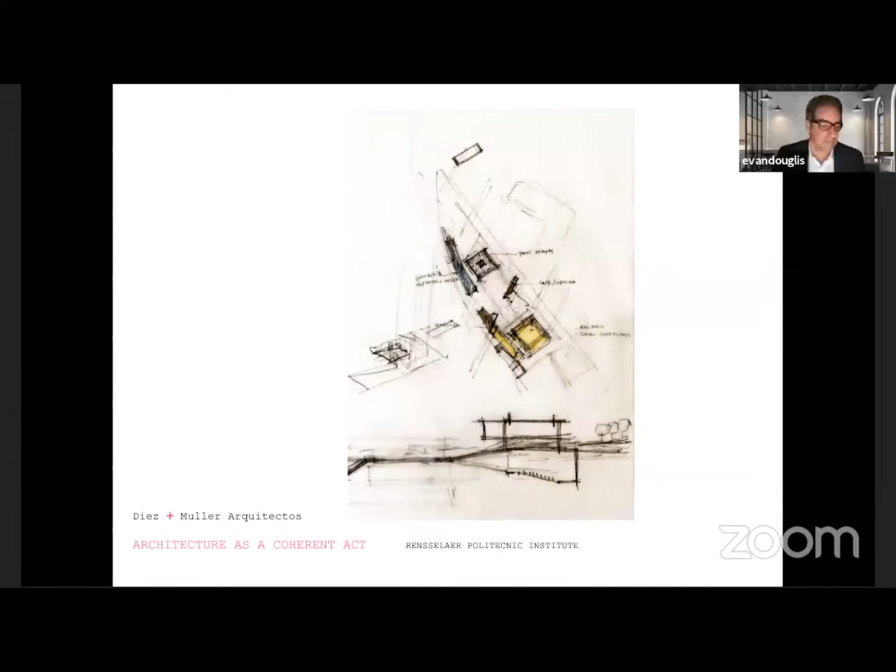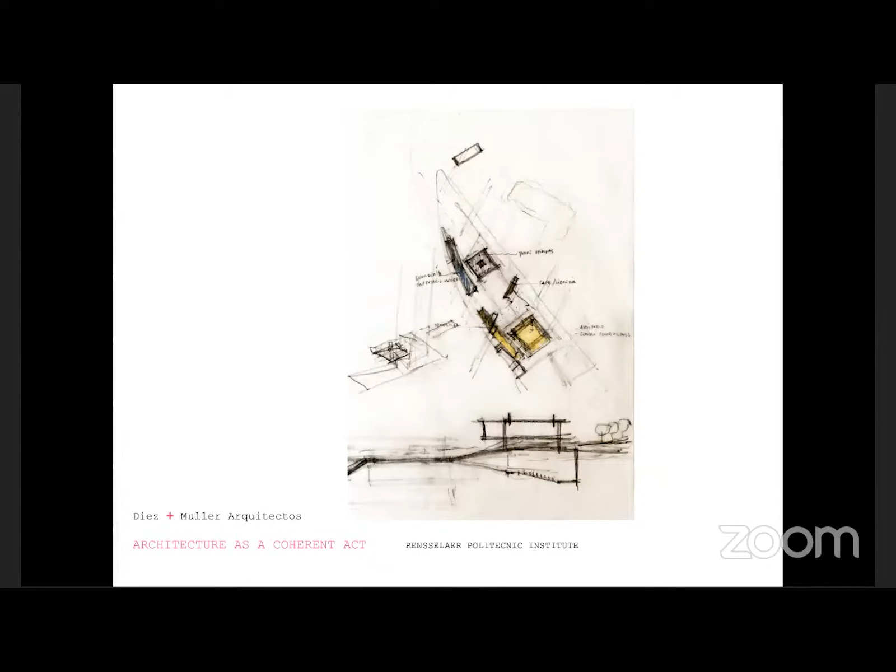Our talk today is called 'Architecture as a Coherent Act.' As I said, we're a design office in Quito, Ecuador. We do all kinds of projects, all kinds of scales and typologies, from small residential private houses to large-scale buildings and residential work.

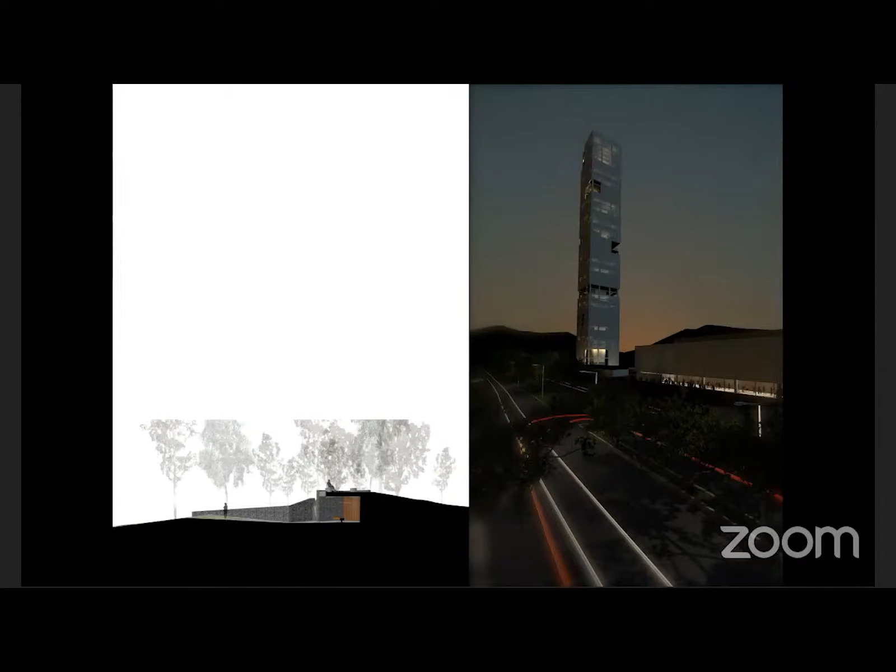For example, here we've done work like a little chapel for a two-person house, to a large-scale project which was a competition for a governmental building in Quito. We do a lot of competitions, and we try to be engaged also in academic work. But as I was telling Evan, our office has been very busy the last years, and we've only been able to do some part-time work with schools, but it's something we really, really enjoy, and hopefully we'll be able to go back soon.

Something important is maybe to start talking about where our field of work is. Quito is in Ecuador, as we know. Ecuador is at latitude 0, right on the equator—that's what it's called, Ecuador. Ecuador has mountains, has the Andes, has the coast, and has the jungle. We live in the highlands, in the mountains, in Quito.

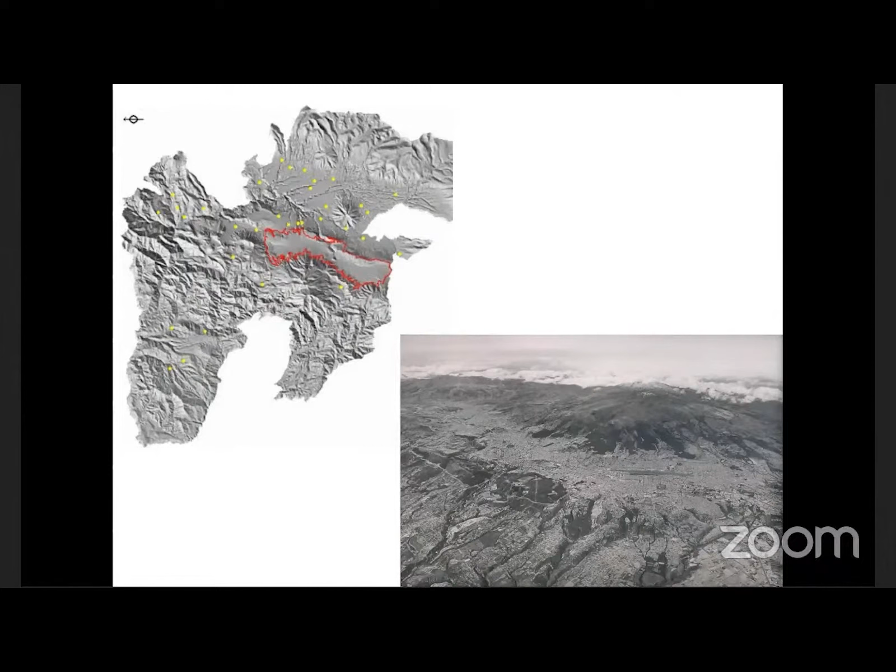In the bottom picture, you can see this strip and extension that runs all across this valley, going north-south. Then you have the mountains, Pichincha in the background, and this other little hill in the foreground that takes you to the valleys—new suburbs where people are moving. The city has grown a lot and gotten very dense, so now a lot of people move into these valleys where the weather is a little warmer. Quito is 2,800 meters high, so it's pretty high, and the valleys are about 300 meters lower with a better climate and temperature.

The lecture I want to speak about, I'm going to show in two parts. The first part I'll go a little faster and briefer, and in the second part I'll show you more.

I'm going to focus on two projects we finished not too long ago and compile a few ideas or reflections about the coherency of working as architects here in Ecuador, especially in the highlands. We've done some work outside the city and even outside the country, but most of our work is focused on the highlands, this mountain region, which is very characteristic and specific in terms of culture, tradition, urbanity, and architecture. This excites us a lot and has a lot to do with how we work.

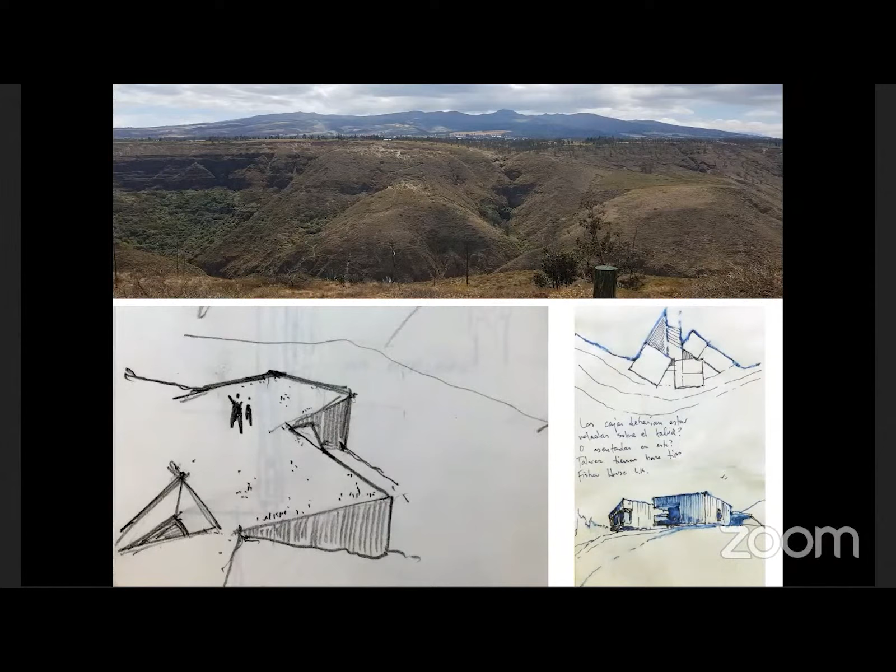Here you can really see what I'm talking about—this big canyon where the mountains and scenery are such a big part of the experience. The views, how you treat the topography, how you situate the buildings in relation to these mountains, is very important.

This house, which we're going to start constructing fairly soon, addresses the relationship with this element that receives you in a very discreet, almost invisible manner from the top of the hill, then opens up towards the canyon and the views. The interior spaces give you a glimpse of what the views, the spaces, and the relationship to the landscape will be.

Our process is I think the most important part of how we work, or what we produce. We're as much or even more excited about how we go through these projects and develop them as the final product.

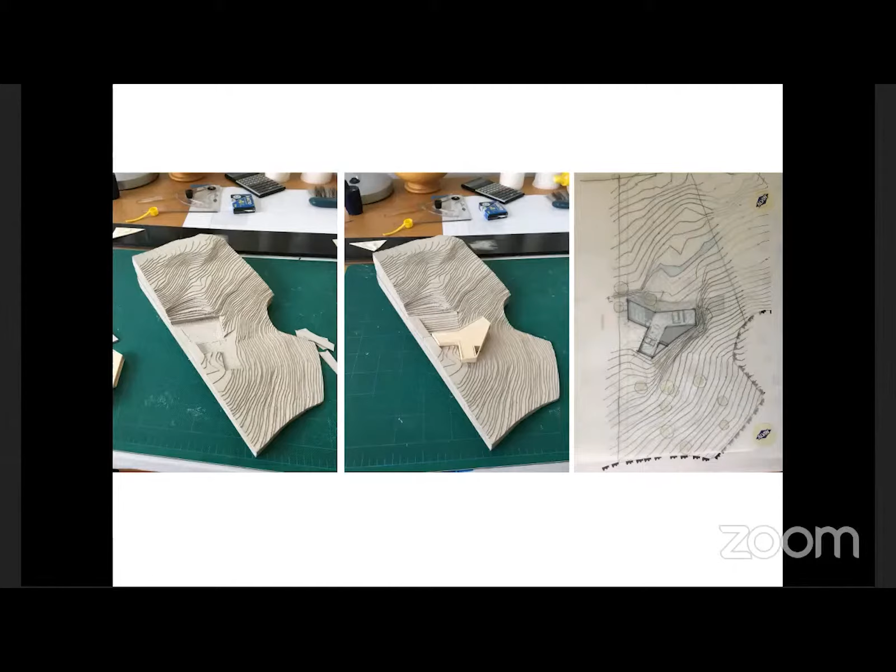This is the result of that first house, the second house I'm showing you. Those initial drawings are studies in the relationship of the house to the place, how this works. This sort of star-shaped house is designed and built within the trees, around the trees, and how part of the house sort of submerges on the right towards the topography, and then sits on the other side of the terrain and opens up towards the view.

And this, you can see very clearly, this relationship of the ground plane versus the roof plane towards the landscape and the views.

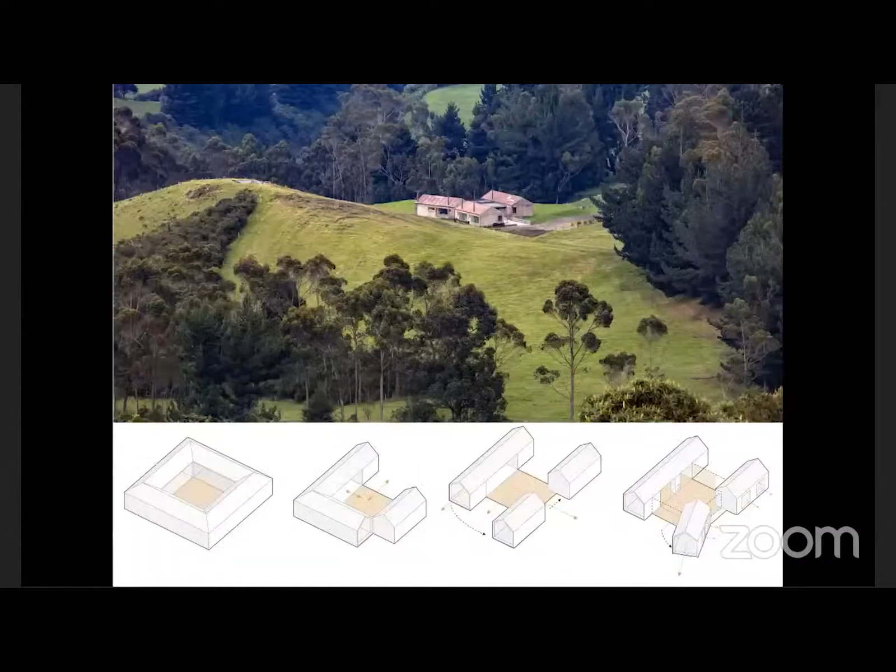This is another house which we finished not so long ago. This is about an hour and a half away from Quito, from the city. It's more on the countryside, on the real mountain. And the views here are pretty much unique because you have all these different volcanoes and snow-capped mountains.

As the house started developing, we started with this very traditional colonial type of arrangement, this U shape with the patio and courtyard in the middle. Then the house started fragmenting itself and orienting its views, with bars that have views oriented to all these different specific mountains. You can see here, this is sort of what we have to work with.

Which is not so bad, and makes our work really interesting because it's so varied and different every time we approach a new project. And again, how the house sits in the landscape and its relationship to the surrounding.

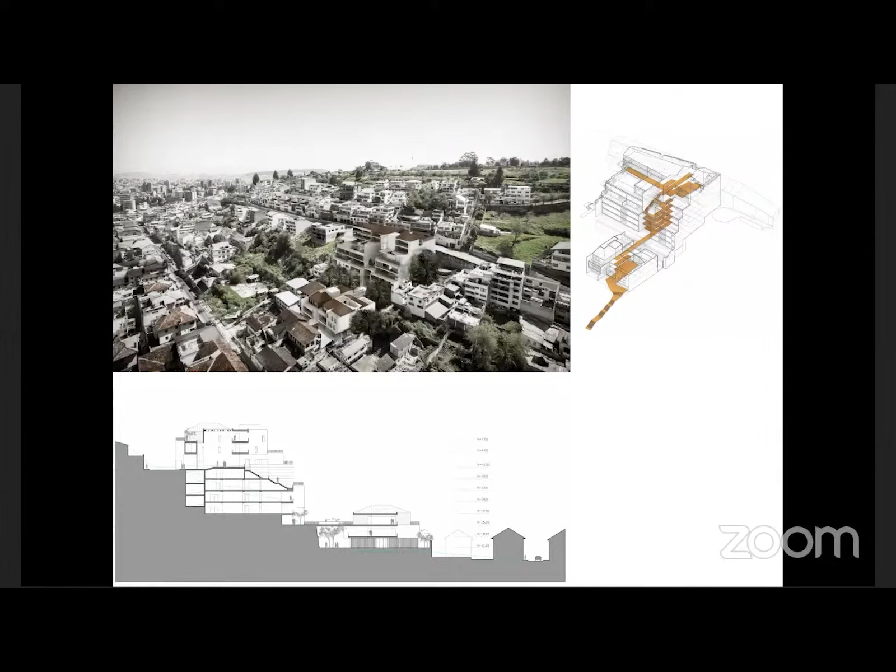This is another building we did, which sits on a really high part of the city. You can see the more urban context here, and that's what I was speaking to you about before, which is how we're sort of lucky to work in these different locations and zones within the city.

This is a building that sits on an existing stone podium that used to be an old house, which is this white, pristine project that looks over the views, but sits in this existing retaining stone wall that used to be part of the collective memory of all these old neighborhoods that used to contain these elevated gardens and platforms for the houses that used to exist here a long time ago.

The second idea, although you're going to see how all these projects mix these themes together, is the idea of matter and tectonics. It's important to say that here in Ecuador, craftsmanship and hand labor are still very cheap and very qualified, compared to most construction in the US, which is more standardized and catalog-like, where you just specify materials and get them together. A lot of the projects I'm going to show are mostly done by people who are traditionally qualified in craftsmanship, putting things together more manually. That's something that really excites us, because now we're not only thinking about space, light, and materials, but how we're going to assemble and put these things together.

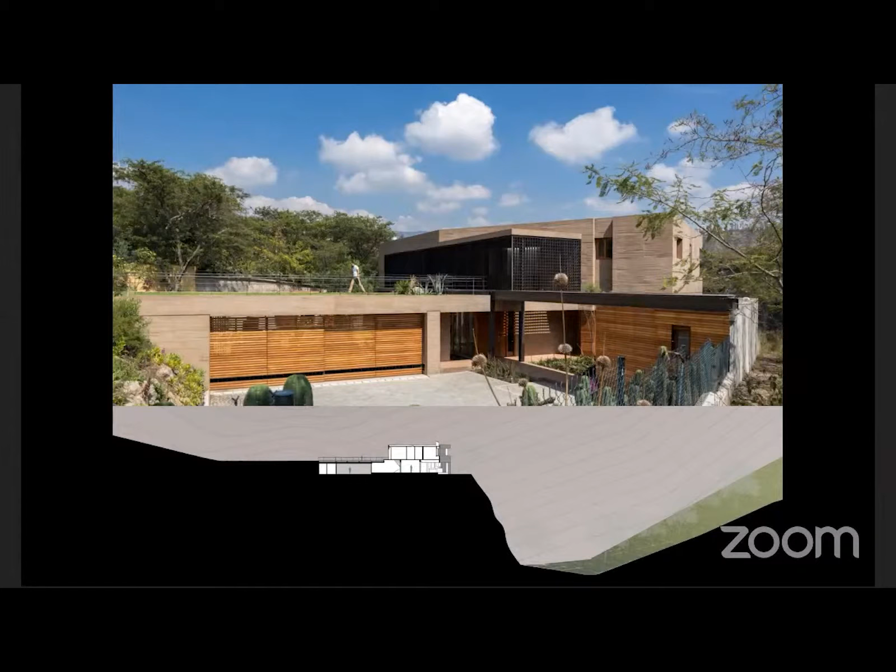I hope that my English is okay, I was afraid it was a little rusty. We don't speak much English, especially not giving lectures in English every day, so hopefully everything makes sense. If you have any questions or want to say something, please go ahead. Hey Gonzalo, it sounds perfect, your English is great, it's perfect. Great, thank you, thank you.

So this house is very much about materiality. The sun here in Quito is very important in terms of how we take advantage of materials—it's the most direct sun you can get in the world because it's almost perpendicular, being on the equator. So the materiality comes to life, I would say, because of this really strong sun.

We have some really strong cancer issues also, but I think if you take care of yourself, the benefits are more important. So here, in terms of how you shade and control the light, it's not only the concrete and the detailing resembling the context, but also steel frames that start to contrast with the more traditional construction. Stone is a very important material here too, which is still cheap to work with, and it's real stone.

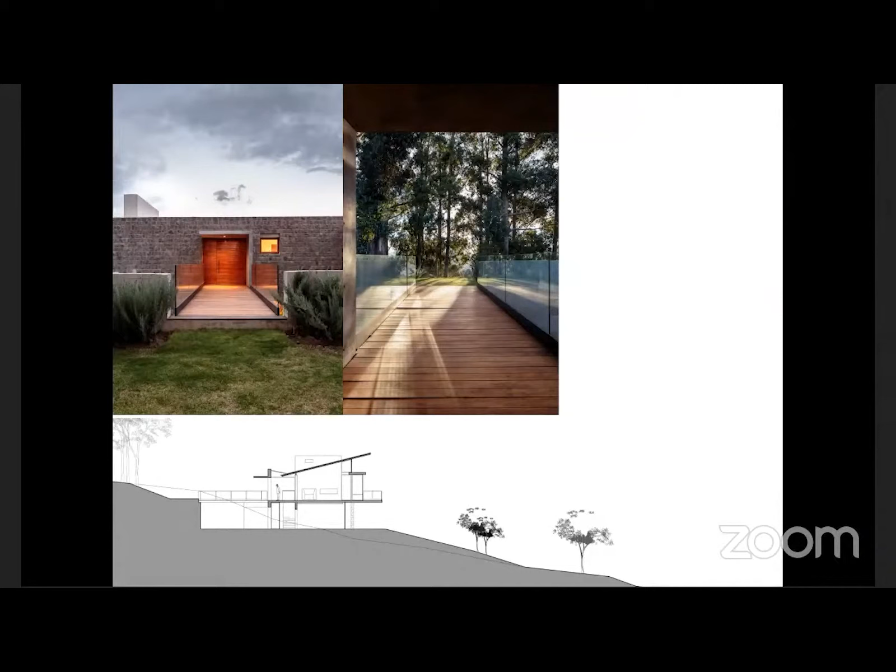This is a house we did a while back, one of the earliest houses we did. It's about this house that sits on a very heavy stone retaining wall, with a lighter structure and roof on top of it. I don't want to show you all these projects in detail, I just want to show the importance of materiality and the easiness of working—not the easiness of the technique or design, because that's never easy, and you have to really think about what you're doing and how you're putting things together.

But in terms of the availability of material and craftsmanship to do these things - for example, here we're working with stone. We have this steel bridge that takes you from the top level of the site towards the house over this courtyard. But the stone we use on the walls is a different type from the pavement stone, or those little details on the floor that direct certain axes, which are smaller river stones. So there's a lot to take advantage of here, and that's where we're interested in most of our architecture - how we use these resources in terms of craftsmanship, of materials, of the people who work these, which are not common in other parts of the world, and that's what we should be taking advantage of towards our design.

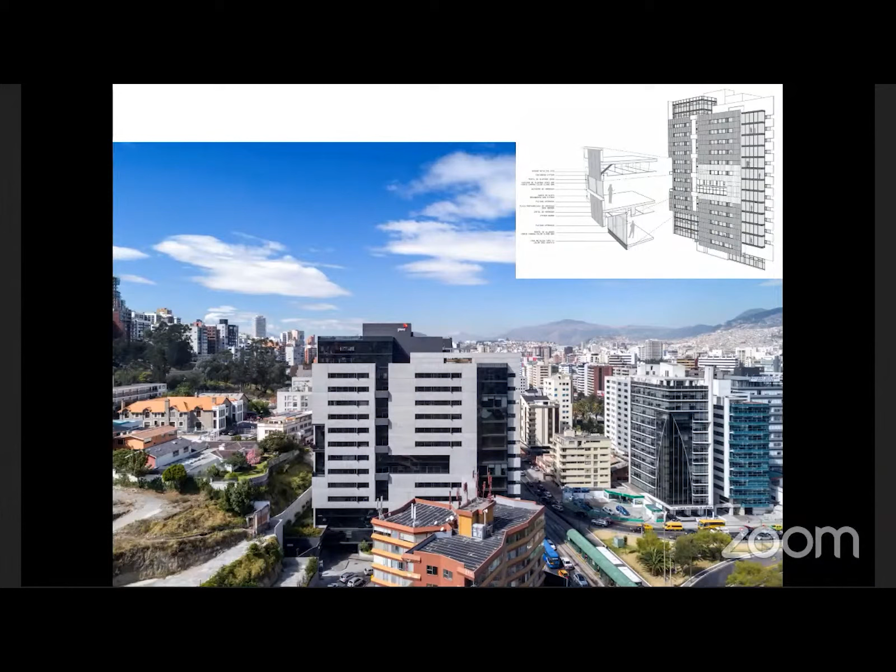So it's pretty much a glass building, in contrast with this other envelope, which is all concrete material surrounding the whole building. The material here is more refined, a more engineered type of construction. We worked with a very big construction company, which promoted the building, and this is where they're having their new offices now. We used precast concrete panels for the envelope, with just a couple of big walls that intersect the building built cast in place. But most of it is these prefab panels that make this tapestry type of finish when you look up close. From far away, as you can see in this image, it's this plastic envelope - plastic meaning plasticity - that surrounds and gives this very abstract sculptural quality to the building.

As you can see, it's a very different type of construction - really good formwork, good quality vibration, good quality pouring, as opposed to that other more traditional and less formal type of construction we saw in the other houses, especially the house we saw before. So they're very different contrasts in terms of materiality, but they both talk about an idea of what you want to achieve in these projects, and the finishes in terms of what you want to do.

You can see the light that I was telling you about in Quito, which is a very strong direct light, which brings this incredible three-dimensionality, this shadow play to all the projects, which is very, very interesting.

I'm not going to show you the whole project, but this is the main entrance. There's a big lobby, some artwork commissioned both on the inside and outside of the project. There's a big public square on the outside, and you can see those big walls that are cast in place. But then the envelope, what's on top of the glass of the lobby, is all prefab panels that were brought and put in place on the side of the building.

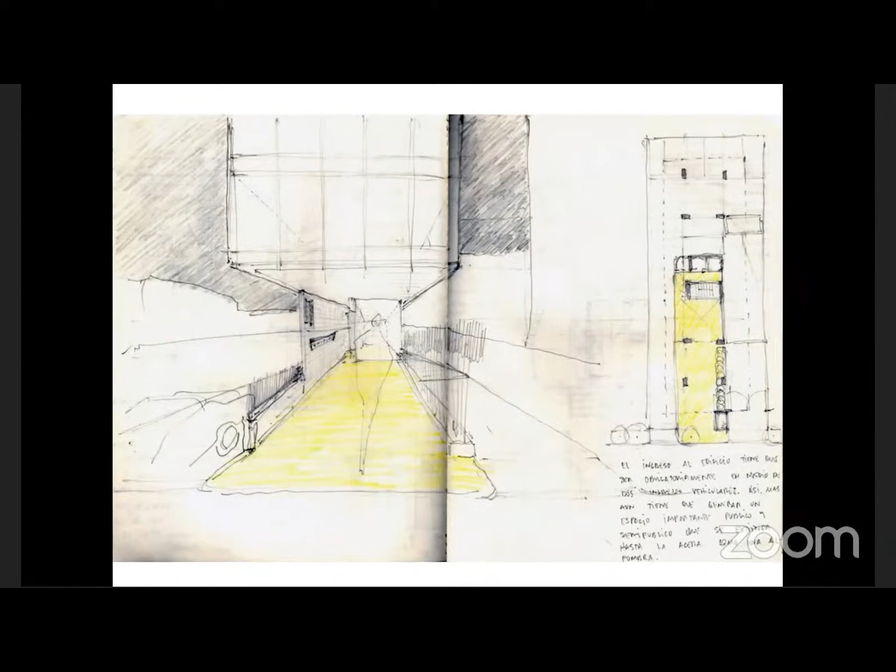As I said, we work with all kinds of projects, and we've had the luck of working a lot in the city, doing some very urban projects in very urban conditions. Other than giving this new face to the city with these taller buildings we've been able to work with, most of our interest in how we work with the city is how the building first responds to that context in terms of its vocabulary. We usually try to work with more silent and simple buildings, whose power derives from different things rather than working with strange or eccentric forms. We try to do these cleaner, more silent buildings that talk a lot about the relationship to context and materiality - that's what stands out. But most of all, it's how these tall buildings sit on the ground and relate to the street level.

That's what really interests us and makes a difference between having this just tall building that you can look from afar, or having these buildings that contribute somehow to the public realm and the city. You have to understand that most of these buildings, as I was telling Evan before, we haven't done many public buildings. We're working on doing some of that stuff. A lot of these buildings are private buildings, so these are buildings that are not really open to the public. They have their own security and more private conditions, but it's how you deal with what's going on at the bottom, the base of these buildings, and how you relate to the public and private realms, what makes these projects successful, I think.

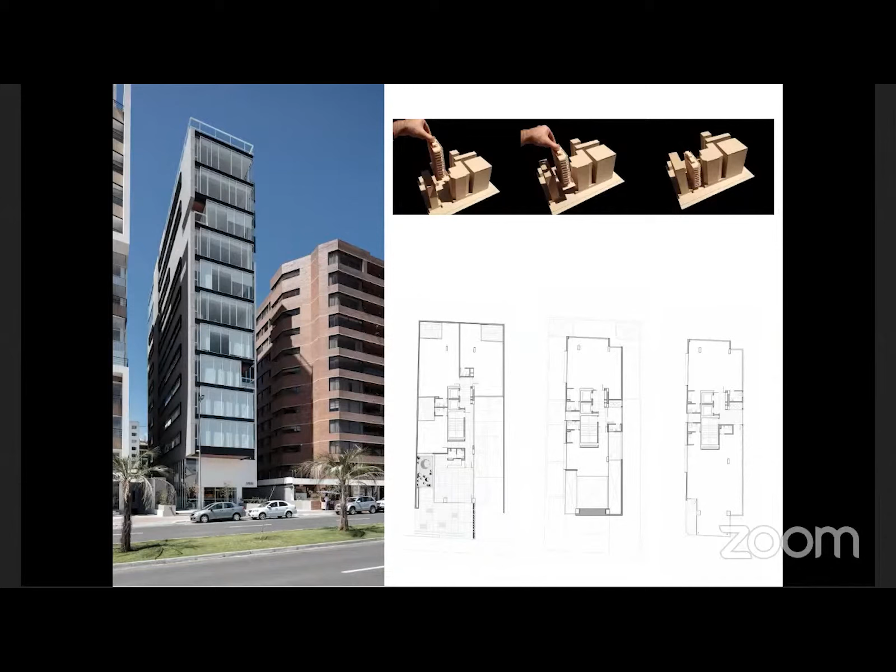I don't know if you can see on these pictures, they're not very good, but the brick building on the right is at a different level from the street, or they have these closings for security. Our idea is to sort of open these buildings up to the city, as I showed you in that other big building, through that open plaza, how you use the landscaping, and how these open spaces start to integrate into the interior of the building.

It's a double height lobby space, which continues the paving and sort of makes you feel, even though you're not part of the building, or you're just somebody using the square, there are a couple of benches, you can go eat there, even if you're not going into the building. That transparency and openness to the lobby sort of makes you feel you're part of it, and this dual idea of that one relates and comes out of the other.

So the idea is that those little moves or intentions make big differences in the city, especially in this city, which is starting to become a very dense city, and what happens on the street side becomes very, very important.

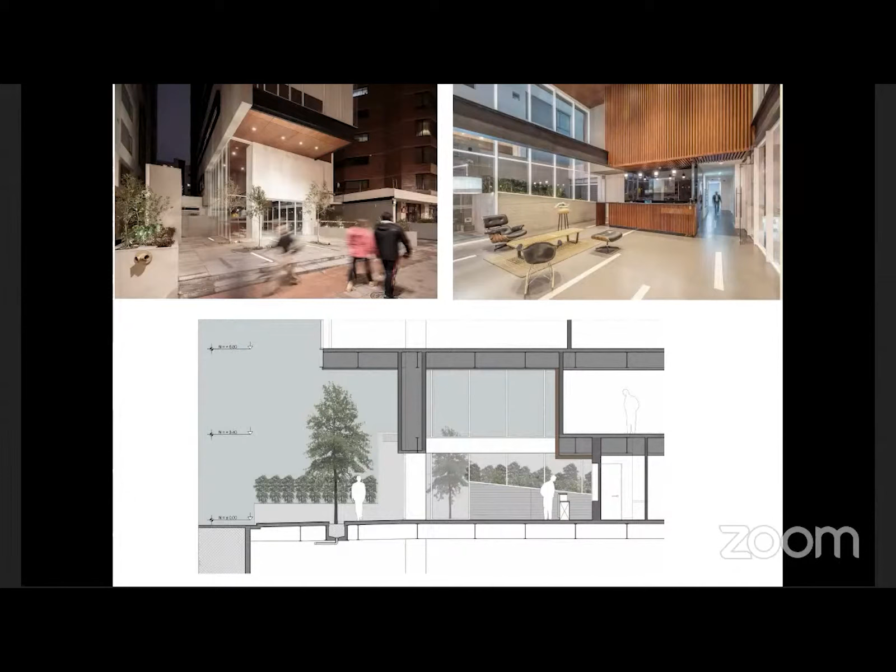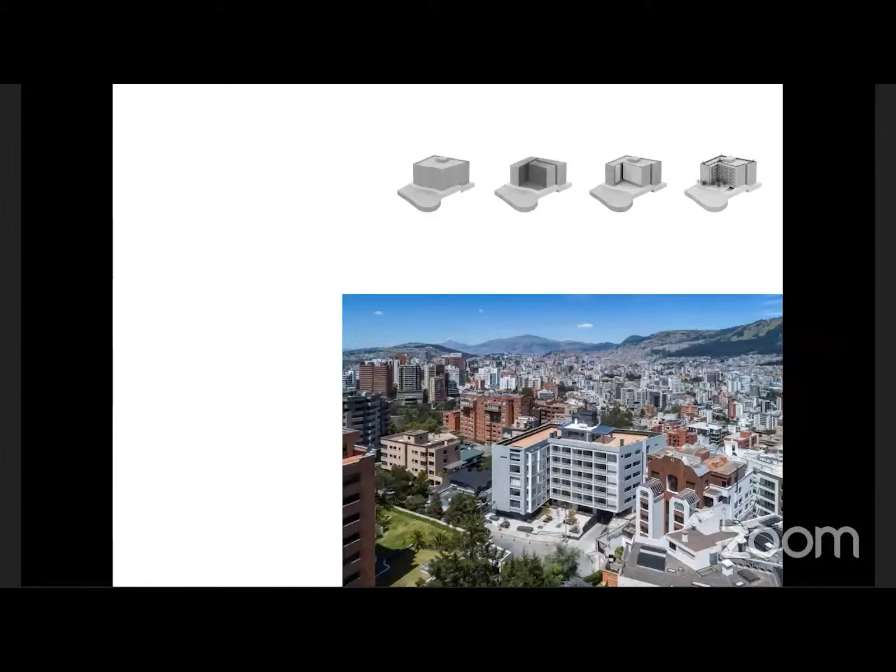Security. Most people think that by building these big walls and enclosing the building, that gives them more security. That's not really the fact, but we sort of approach it the other way around. We sort of open these plazas to the city. This has sort of an L configuration, an L-shaped building that opens up and gives this narrow street a big opening, where, as I said, it's sort of a private, semi-private, semi-public square, but all the people around it use it. The kids in the building go out and use the plaza, they wait for the school bus there. So it's how, independent of the architecture itself, how you permeate these buildings towards the city, and the difference you can make by opening these spaces up instead of enclosing them towards the street.

And then you get all these more interesting spaces where a lot of activities happen. Landscaping, benches at night, it becomes sort of a lively place that relates to the circulation or the apartments on top, and it becomes a very lively place.

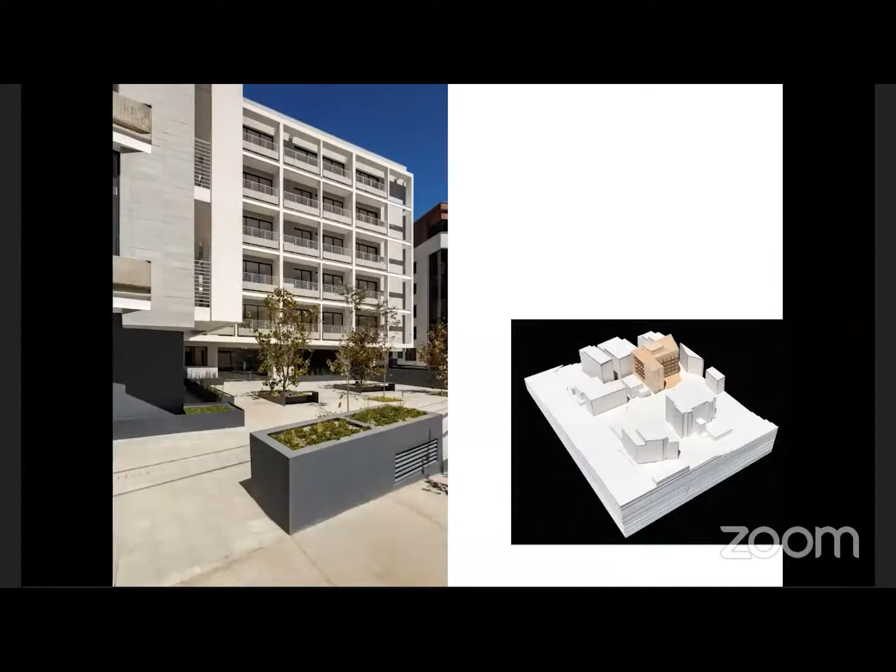Before I go into these two specific projects, which contain most of these ideas, there's the idea of sustainability. That's something we're working on more every day. It's becoming a big part of what we do as architects. I think maybe we're a little slower or behind what's happening in more developed countries like the US or Europe, but it's catching up fairly quickly, and it's something we're very interested in, hopefully taking into consideration for most of our projects in the future.

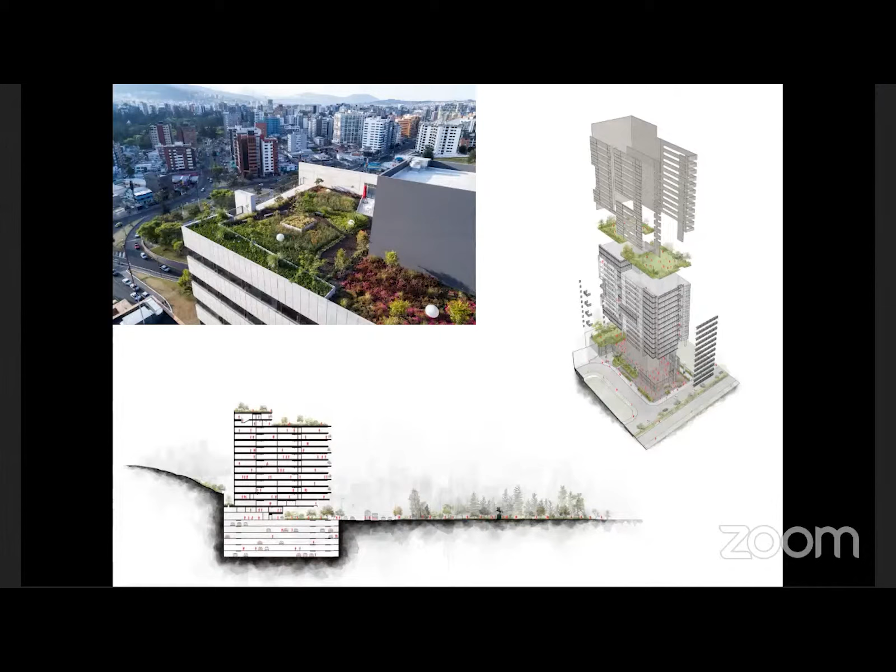This is one of the first LEED silver buildings approved here in Ecuador. Other than the greenery, it has a whole bunch of things that make it a very eco-friendly building.

This is what you see when you're on the terrace. It's not just a green roof, it's very... what would you call it... you sort of feel like you're in a house more than in a building itself. There's a relationship to these elements, like concrete walls that frame views toward the city, and then you look to the mountain. It's about these buildings starting to bring a little more than just architecture and aesthetics to the city, but a little more consciousness too.

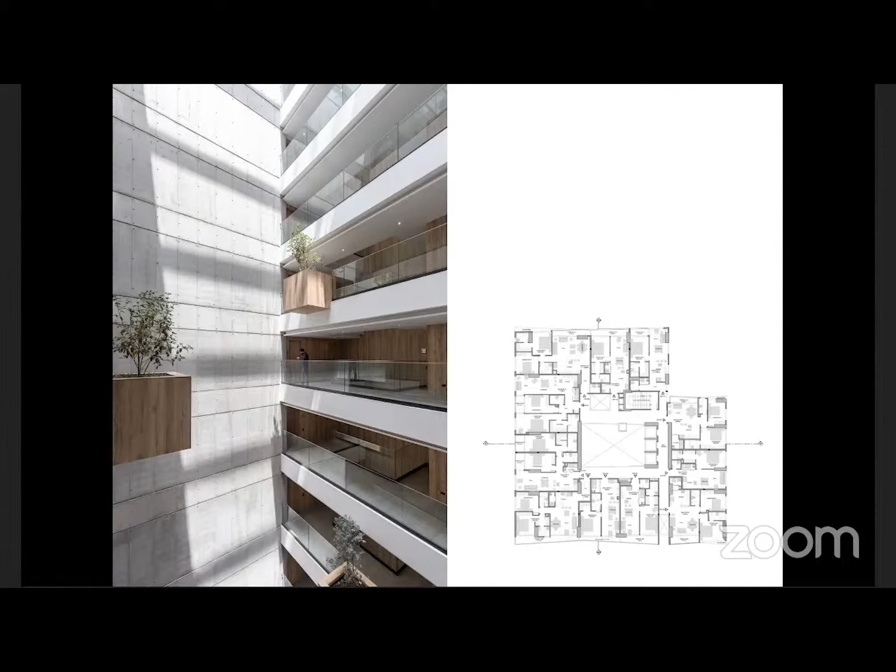Then there are these little elements holding plants and trees in the air that go randomly above, all along the building and the atrium, ending up on a green terrace at the top. The scale of this building is very interesting in terms of these big closed concrete walls versus the circulations and little boxes of vegetation that randomly appear all around and up into the project.

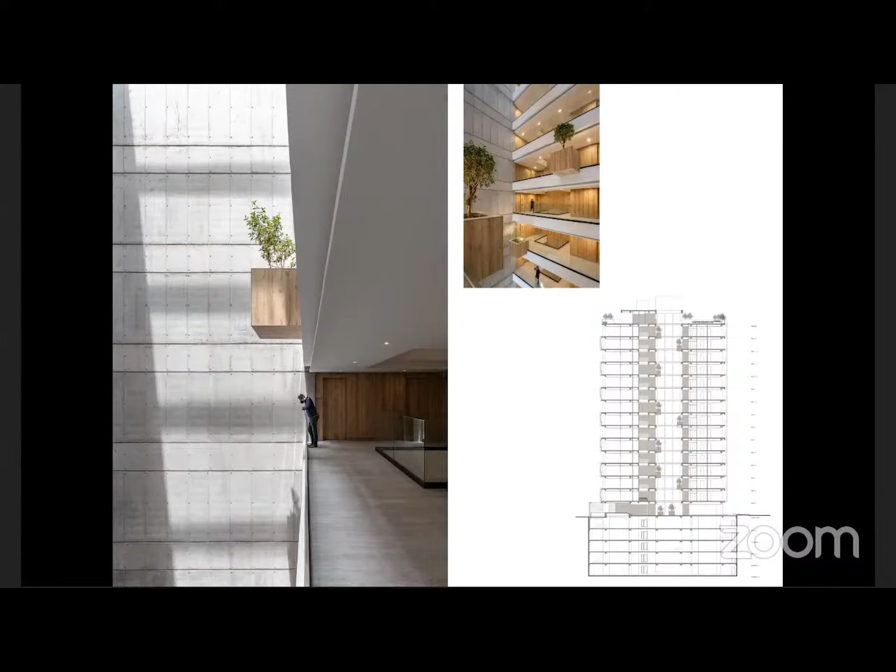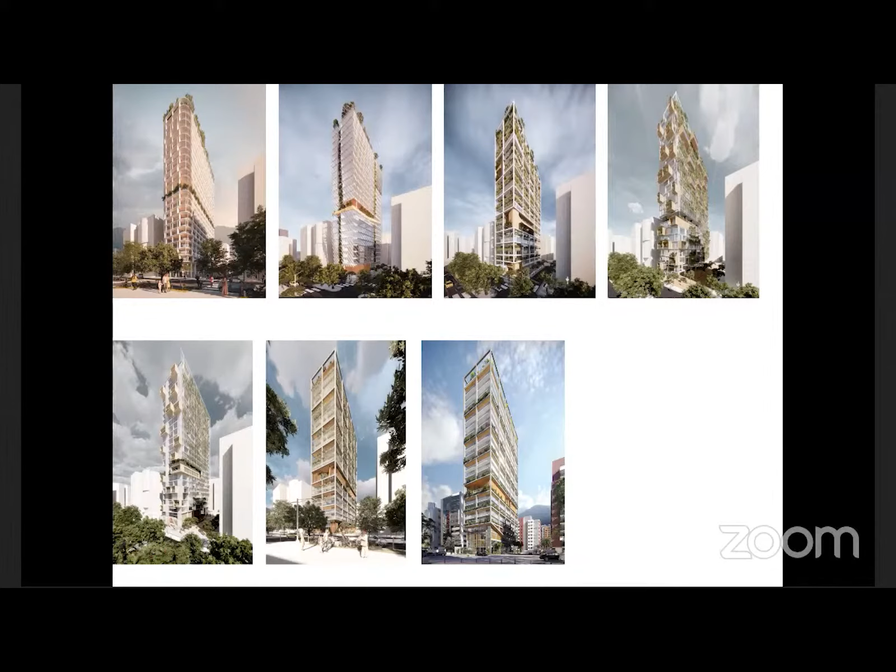Now I'm going to go a little deeper into two projects that talk about a lot of the ideas that I mentioned before.

One of them is the Natura Building, a project we finished 2 years ago. This is where we have our office, and my partner Felipe lives here also. It's a mixed-use project: 70% office space and 30% residential, with only 5 apartments and around 25 offices. It's a project we enjoyed a lot and are very proud of, because it speaks to a lot of the ideas and the way we want to start living and designing buildings as architects.

As I showed you in one of the first images, you have the city on this plateau, and then over the hill you have all these valleys that are growing very fast. This building is in one of those valleys, which is pretty much the one growing the fastest.

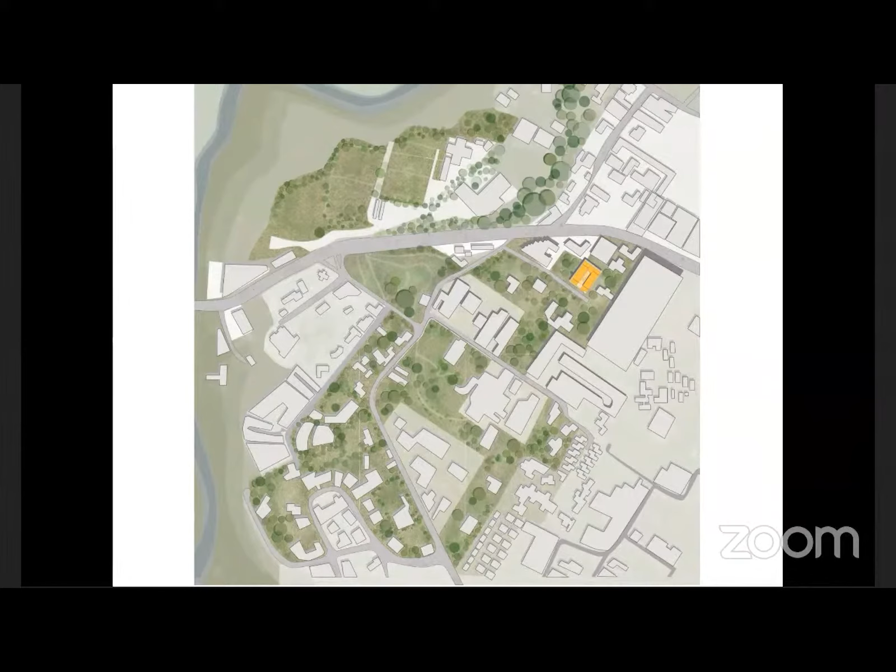really speaks to the way of life you have in these valleys, which is direct contact with nature—a little less evident in the city, which is harder, less green. And it's about how you want to start designing buildings that aren't only houses sitting on open landscapes, but a little more dense, while really responding to ideas of climate, topography, nature, greenery, and materiality.

They're wider, a little fatter. So we started understanding this place as a very green, low-key type of place. There are still a lot of residential houses here, so we thought we really had to maintain and respect the greenery, the scale, and the relationship of the building to the street and to the neighborhood.

Even though this was going to be an office building, we didn't want to make it very open and permeable, but something that respected and matched the materiality of the surrounding houses and context, maybe turning it outside in—so what really matters and becomes important is what's happening on the inside.

The first part is some diagrams that talk about the site itself. There's a one-story difference in levels from the street side towards the back of the site. As you can see, there were a bunch of really old and important trees that we wanted to save, and we didn't want to come in and do a tabula rasa, but instead maintain as much of the greenery as we could.

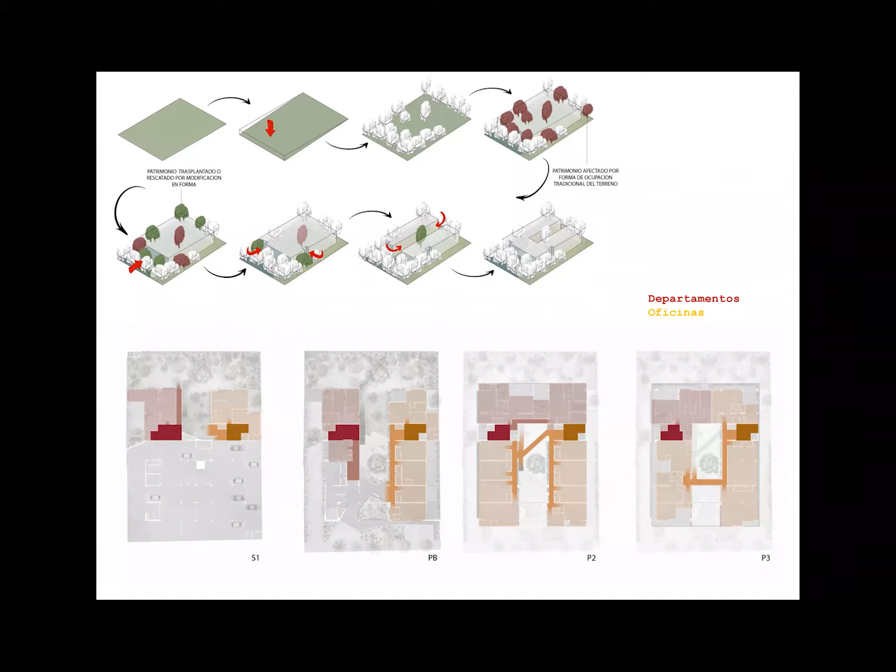As I said, it's this U-shaped project, which from the outside works as a very enclosed, silent, and discreet building.

This neighborhood, which is mostly residential, always has this fear of a bigger building coming to contaminate this smaller scale type of neighborhood, so that's something we wanted to be careful with. It's only a 3-story building with a very enclosed facade, few punctured windows and openings towards the street, so there's big privacy between the office spaces and the existing neighborhood. But it's a very permeable and open space on the ground floor, which is the main idea of what we wanted to do towards the context.

It's a white brick construction mostly, with some exposed concrete in terms of how these brick walls are sustained, and this materiality starts to talk to the neighborhood. A lot of the houses across the street and next door are brick houses, some white brick. So we wanted to do this very contemporary building, which talks about a new modernity in the valley, which is a little more traditional and rustic in its architecture. The materiality helped us achieve that low-key, more traditional type of architecture. It reminds me of Alvar Aalto in how he managed to do modern buildings that are still really related to the context and the country.

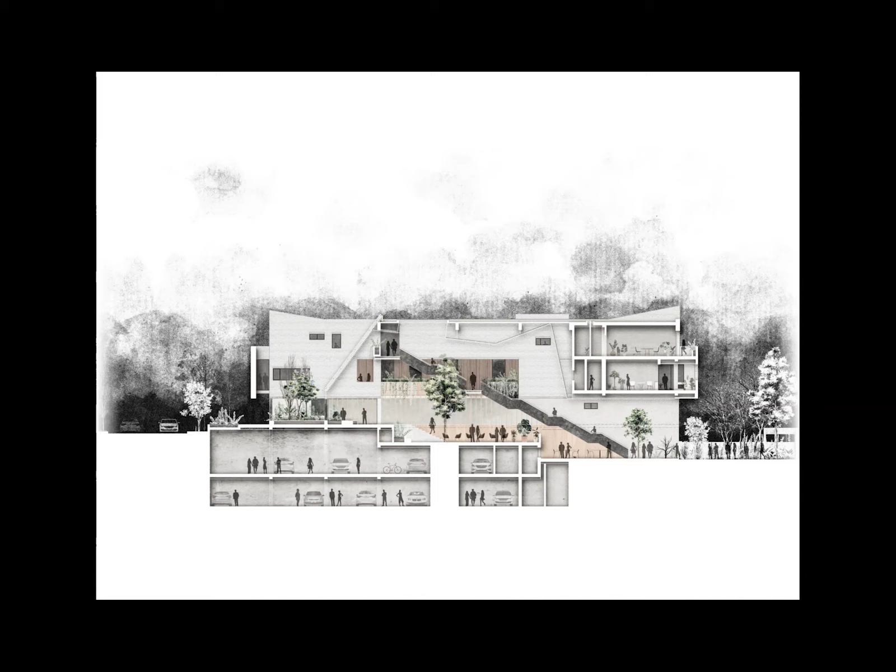It opens up through a series of patios, openings, and exterior gardens and spaces. As you can see on the left of the drawing, it goes from these filters from the street, green gardens and patios, and a very enclosed, blind facade toward the street, into this 3-story atrium which sort of explodes once you come in. That's something we really try to do in our projects, not discover everything at once - as we arrive and move around the project, we start discovering things. It's a big surprise, because from the outside you don't expect what's going on inside, which is this really big 3-story space that circulates towards the perimeter offices or apartments through open stairs and bridges that connect and serve all the different levels of this U-shaped configuration.

Again, the light towards the material is something we really take advantage of. It's what brings these materials to life, this Quito sun, which is really amazing. And then again, the white brick contrasted with the wood, which we wanted to use to create a little more contrast with a warmer material, which is what we've done on the inside.

It's a place where during the day it promotes people not only moving from place to place in this big atrium and open circulations, but through a series of stairways and sitting areas, there's even outdoor tables and chairs where people have lunch or work on their computer - sort of like outside co-working areas, which are very successful in terms of how people relate inside the building. We wanted to make this space not only for the use of the office or the people who work there, but for other types of activities too.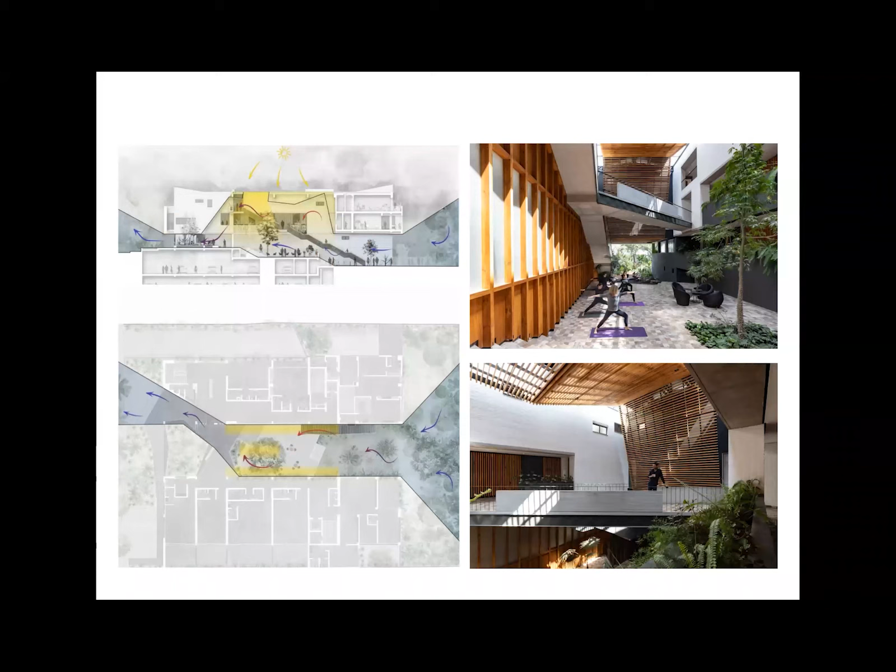As you can see, from the left, which is the street level, the atrium terraces down to the right and ends up in this garden, which you see in the top right picture, through these stairs and platforms, ending in this big area of greenery, which was mostly the existing trees of the site, and it's open on the bottom. So the air comes in and usually rises up to the other side or the top of the atrium, and even though there's a lot of sunlight coming in, it's a very fresh, tempered and nice place to be in.

But again, you see the idea, and this is probably what excites us mostly about the project, which is this idea of working and living in this very, very green and old landscape that existed in the original site.

This is what we worked from, the top image on the left, which is all this greenery hanging from these levels on the atrium, all the way to these gardens on the back, and how they relate to the different spaces. Being these really old buildings, for example on the image on the bottom left, our office is on the top floor, but we have these trees that go from the 4th story down all the way up, and an outside space in our office. It's very nice to be related to the tops of these trees and the views.

We came up with something like this. The plant, which is those white volumes, sort of grew a little more towards that parking area that you saw before, and it ended up leaving these wedge or teeth-like shapes.

So what we proposed was that the main building, the main facade of the plant, which used to be nothing, instead of having this 4-story little block, would be this really long horizontal building that would be sort of the new facade or the face of the project, where you would still see the plant on the back, the industry plant, but it would sort of give them a new image, a new face to what they had, which wasn't very nice before.

And so what we proposed was this very elongated snake-like project, which sat on this irregular site. Between this long project, long building, and the actual buildings on the back, we were going to build sort of the support spaces like cafeterias, all the service areas, lockers.

They have about 500 employees there that work in the 24-hour shifts.

So it was going to be how to contain all this new project against the old plant, and then start to bring these new gardens and open areas between these two areas that relate the two parts of the project.

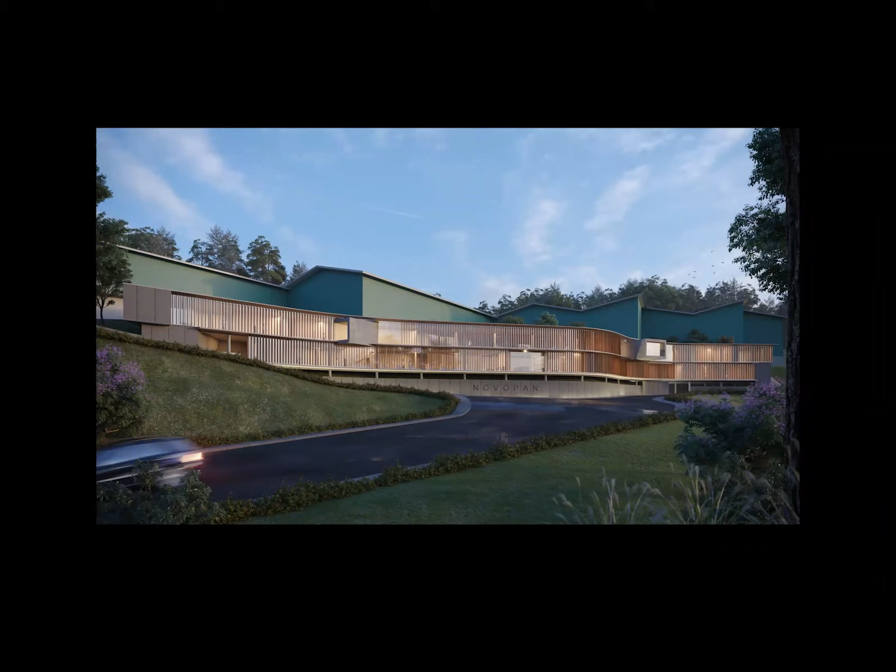And this is what we ended up having, and what ended up convincing them of the idea, which was seeing this industry through the face of this new, really permeable, open building towards the street and towards the highway. That is pretty much what you see when you come in. It's a very visible building from the highway, from when you're driving through there.

And what we told them we wanted to do was, since they produce these melaminic panels that they use for all kinds of architecture and interior and finishings, was that we wanted to do a building that was pretty much, the architecture was the structure. It was a concrete structure, and their panels, and their melaminic panels.

That was pretty much going to be, well, we had the glass and the envelope also, but there wasn't going to be much materiality in terms of finishings, just the concrete and the wood, the melaminic wooden panels that they produce.

And this is what I was telling you. You have that long, really elongated, irregular, sort of curvy building on the front towards the street, which is a very open office area.

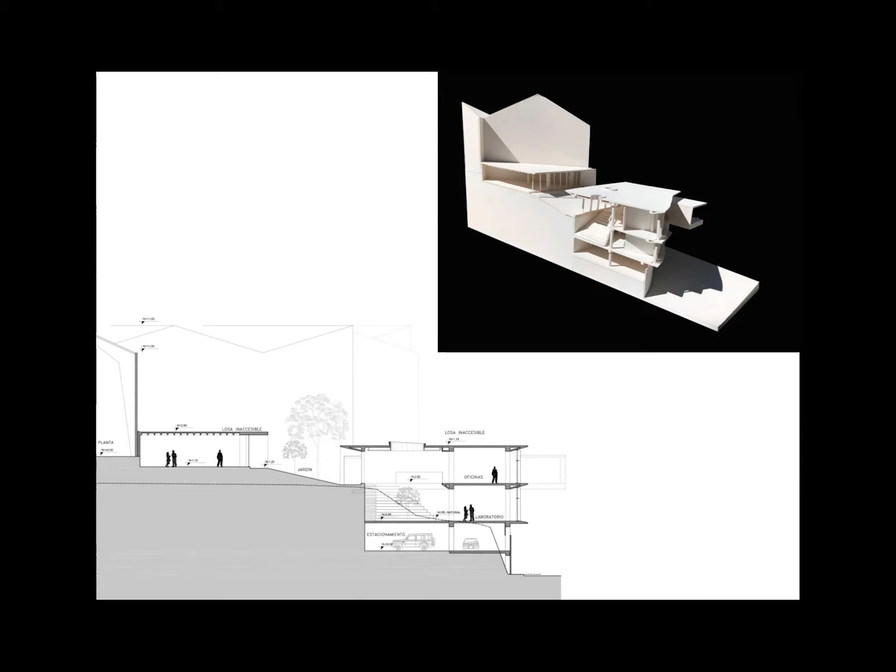Here you can see the section. We do a lot of models and section models too. You can see the relationship of the building, the atrium, the relationship to the view on the right, but also to the back of the garden and the cafeteria, which is going to have a direct visual relationship between the building and the back.

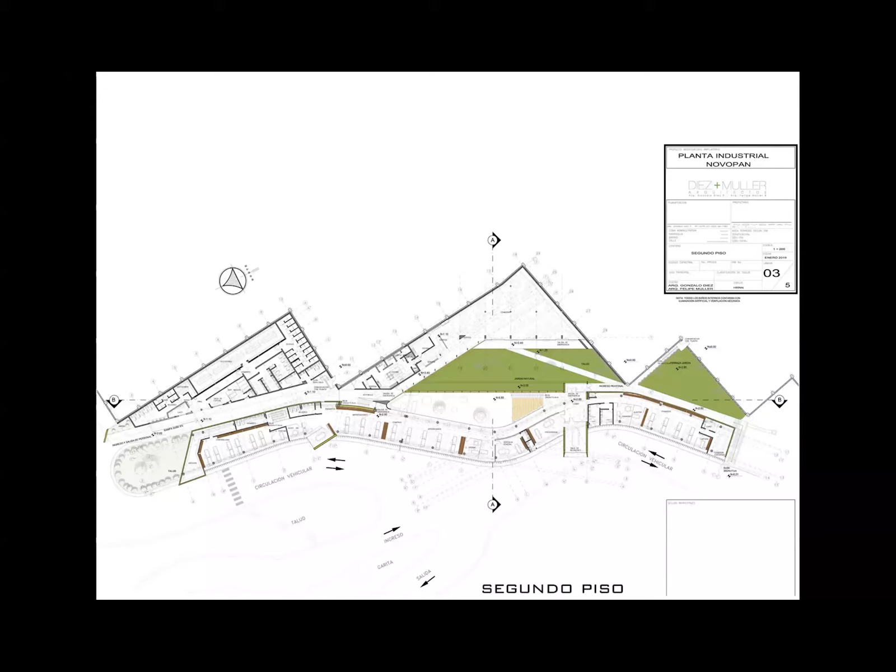What we also ended up doing was, since part of this building, because of the angle of the wavy form, faced afternoon light and sun, we did this system of louvers, made of their own material. It's incredible because they had no reservations in terms of using all the material they wanted. They would have made the sinks out of their material if they could have. So that was a real pleasure in terms of doing this sort of skeleton box and just using a few finishes with their own material that they could use as much as they could.